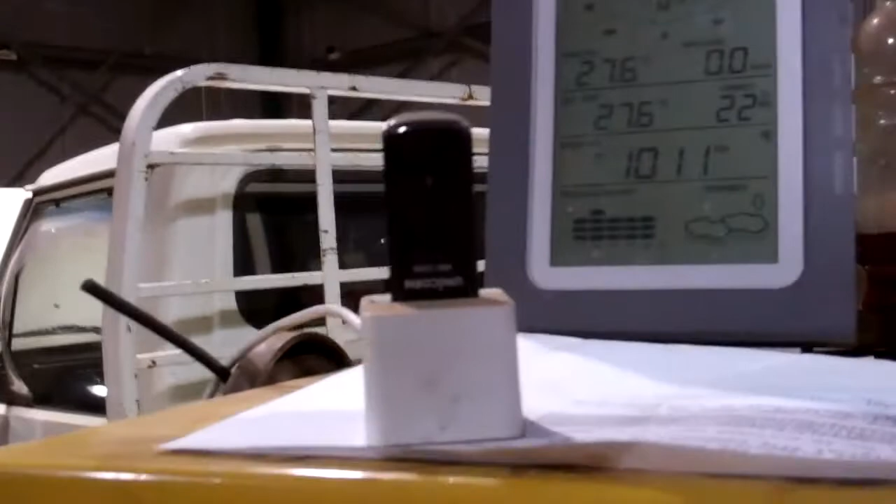This is the little aerial here. That's the dongle that plugs into your computer. So we'll plug him in to the USB port. Rightio, it's transmitting away. Now, this is the program you need to run the wireless Wi-Fi. That's available from the G-Scan Oceania website. Every time you do a software update, you need to load the new one on. The last one's not compatible with the new one. Okay, so we'll hit that, open that up.

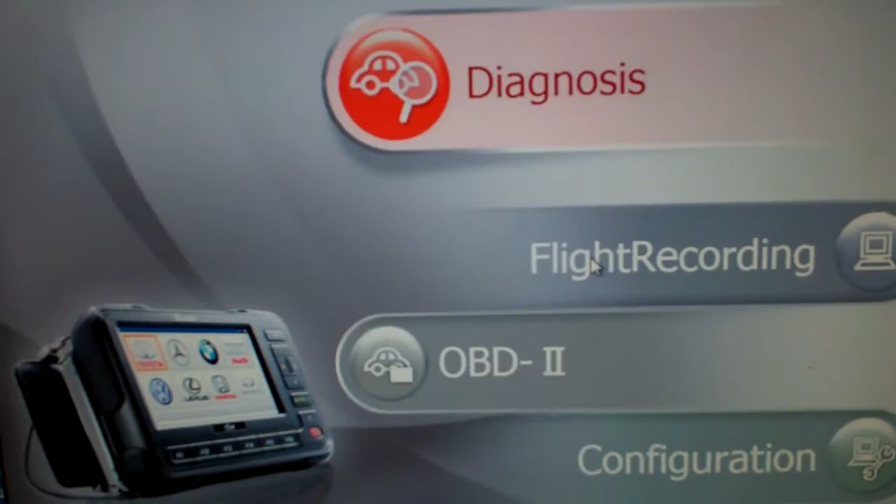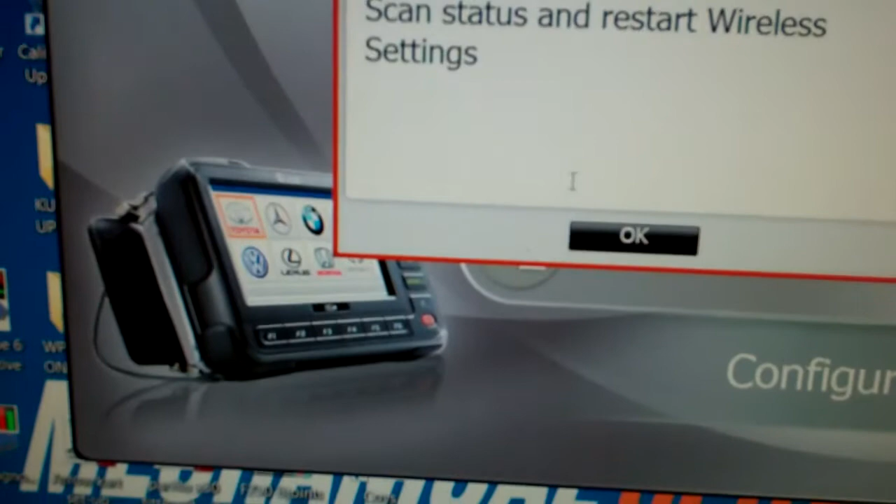Right, we're greeted with this screen. This is our opening screen that just starts us off. As you can see, it's just an emulation of the G-Scan screen up on the PC. So we'll hit diagnosis. Now it's trying to find a connection. Oop. Okay, we need to turn the G-Scan on first.

So come over here, I've got my Hilux in here running, idling away with the G-Scan connected to him. We need to hit F1. That sets up the Wi-Fi mode. Okay, now it's got something to look for. This is the dongle that plugs into it. It's supposed to have a nifty little pouch that goes into the handle of the G-Scan. They should do away with the original handle. We put this in, but mine didn't work from day one. It's pulled straight out, so I don't have a handle. It doesn't matter. And it plugs in the top there. Alright, so that's now going to be emitting a signal for this one to look for.

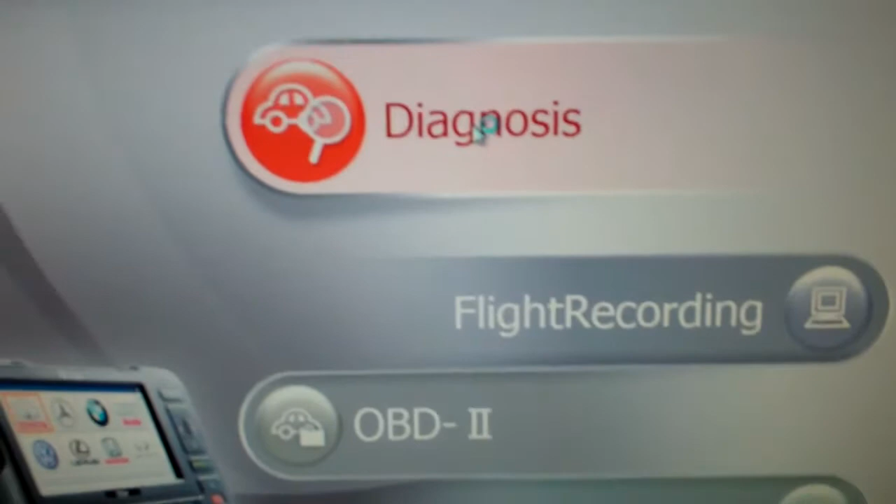So we'll try again. Okay, diagnosis, undertake wireless connection, and yep, looks like it's found it. Okay, same thing. There's the G-Scan screen emulated up in your PC. You can't alter the size. That's one thing I don't like, especially with my eyes getting worse. Right, so we can flick through all the different manufacturers here. Obviously this is Toyota, so we'll just go Toyota.

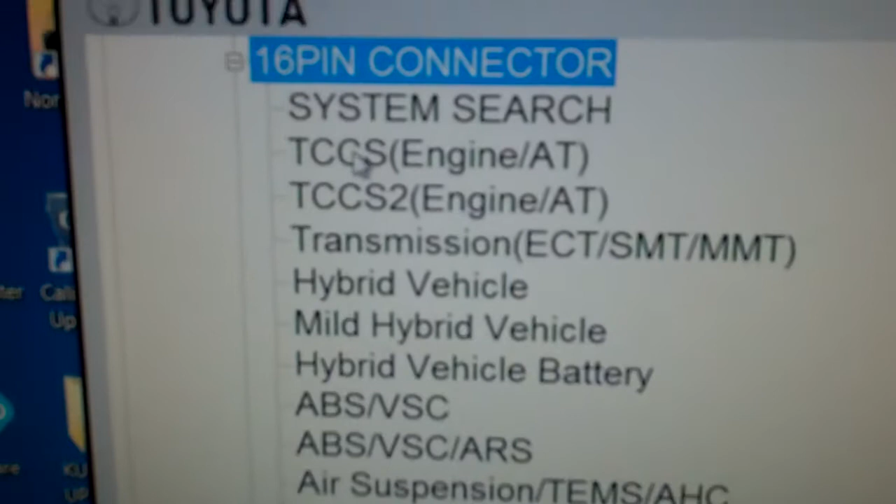Now you can just double click on everything here until you get to a certain screen, then you need to go down to the bottom here. So international, passenger car, all model, all type, 16 pin. Looks really fast, isn't it? Rightio, here we go. Now this is where we have to go down to OK. We can't double click from here.

Good thing I've got a beer on hand for this one.

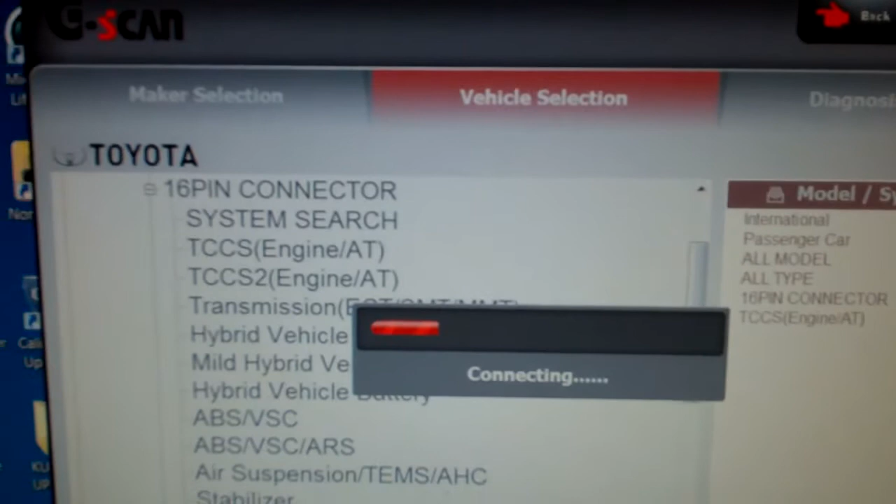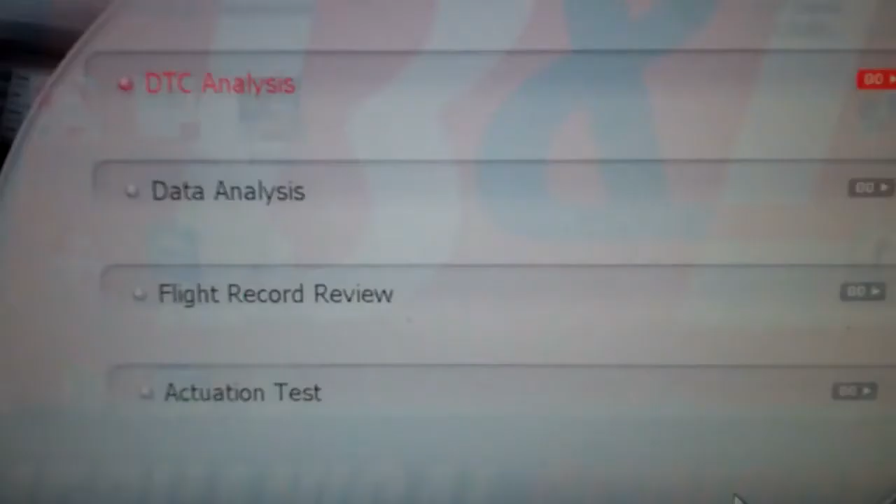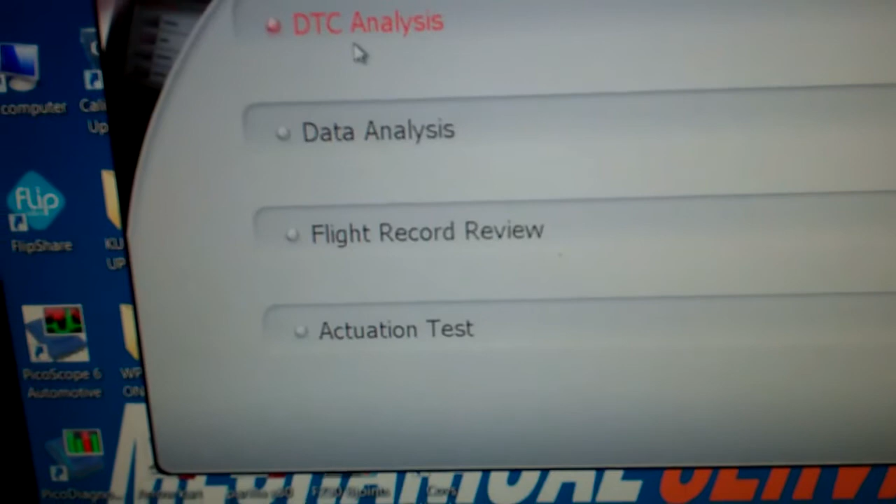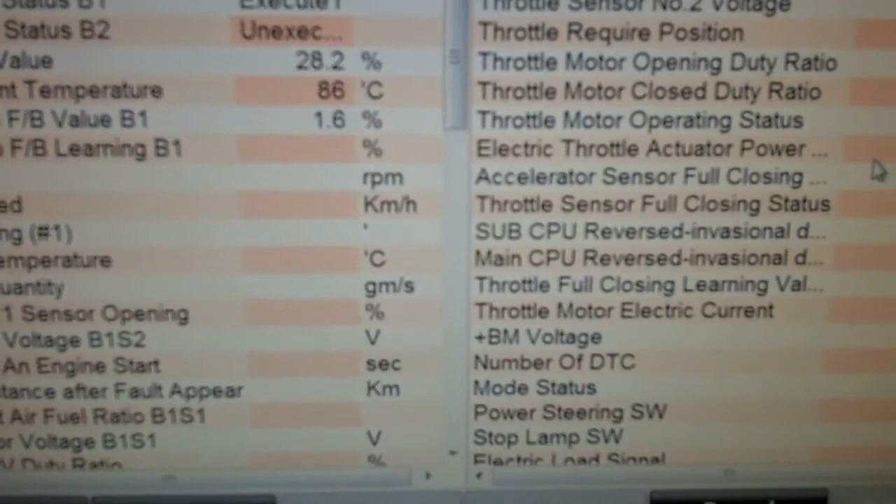Right, we're away. Okay, same thing. You're greeted with the same screen you'd find on the G-Scan. Your trouble codes, your live data, freeze frame review, flight record review, actuation test, special functions, whatever. So I'll just go back up to live data. This is what I was talking about during my post on Auto Nerds. We'll go live data. And this will give a new meaning to slow. Rightio. Come on, load up. Here we go.

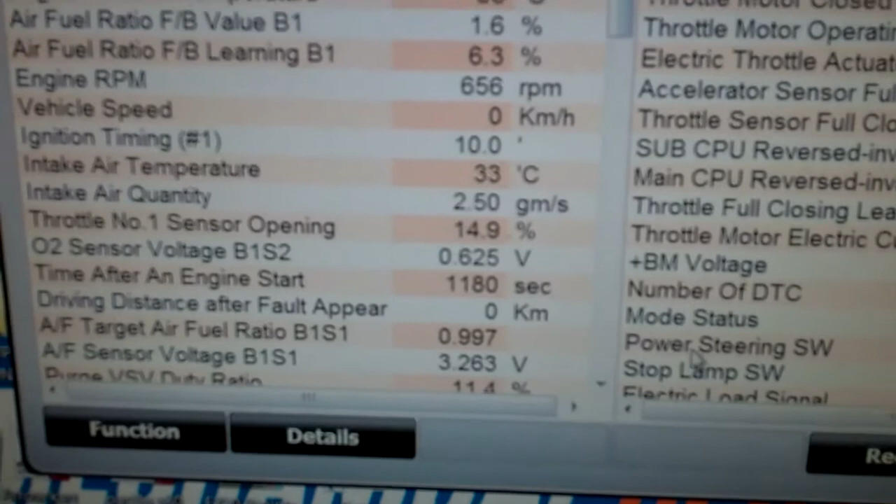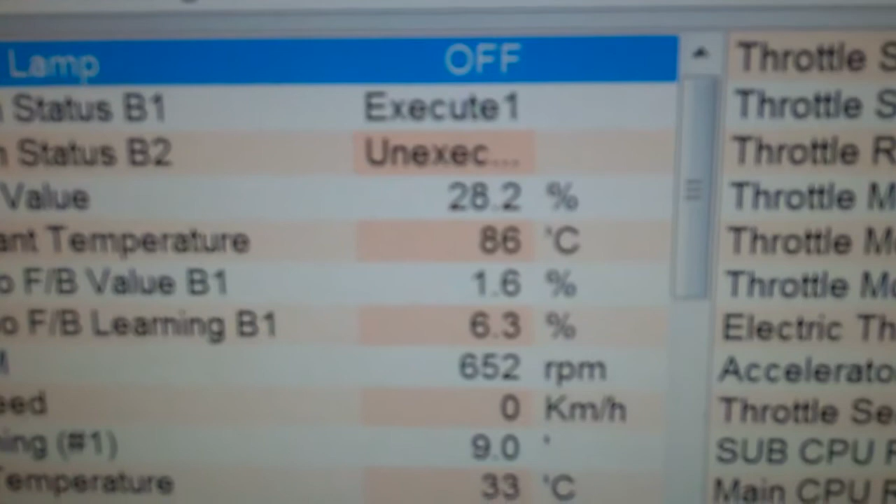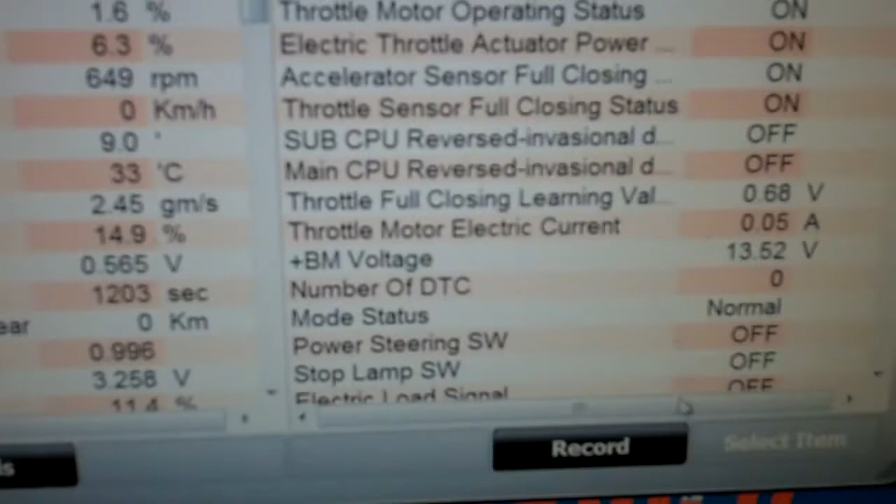I don't know if you can sort of see those values there and the various PIDs. We've got a very, very slow refresh rate. Almost non-existent. And I've tried revving the car and watching them, and yeah, there's not much cop in the live data, but anyway, it does have its good points. That's why I say I use it for injector coding, because I like to sit here and use photographs of the injector codes that I take with a macro setting on my camera, and maximise, minimise it, things like that, just to get all the codes done really quickly.

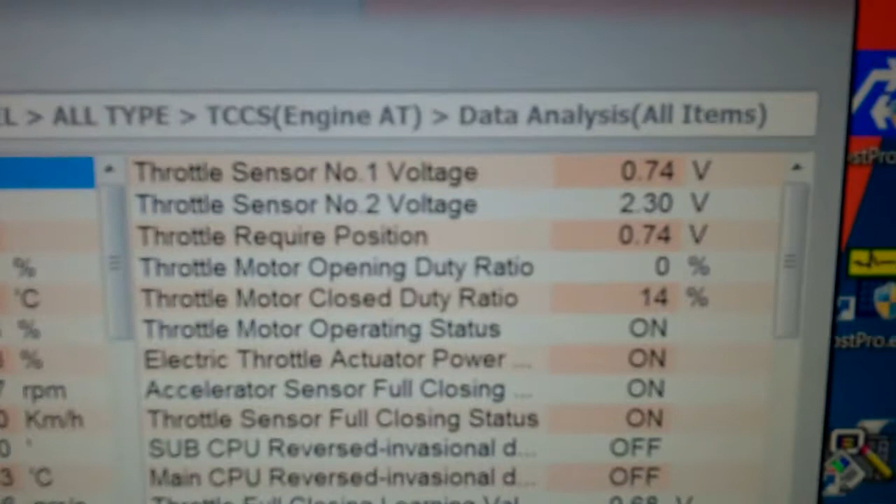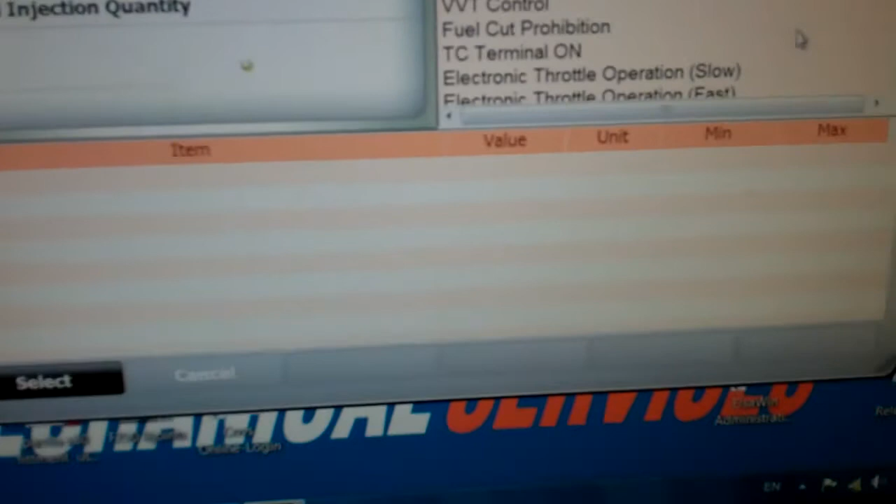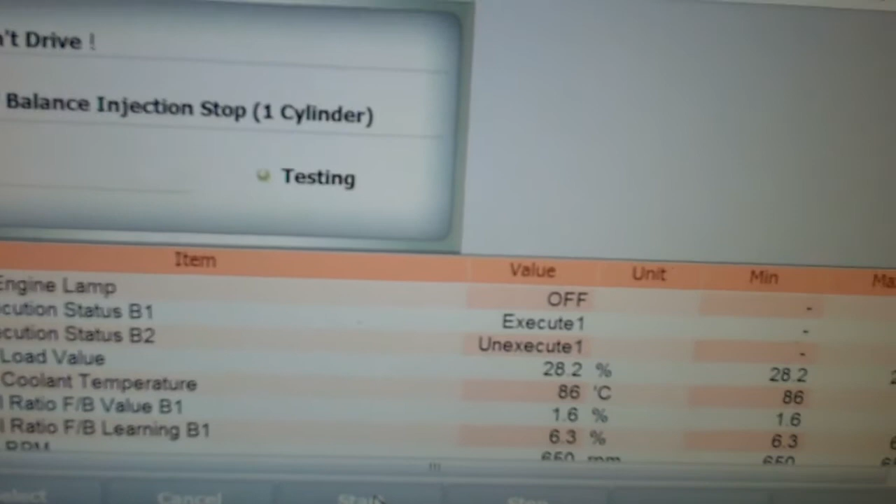We'll go back and we'll look at some of the actuation tests. These seem to operate pretty quickly. It's not trying to sample a whole lot of information, I guess. So we'll do injector balance or power balance. Select. Start. Oh, test failure. It didn't go too good. What happened there? We'll try again. Cancel.

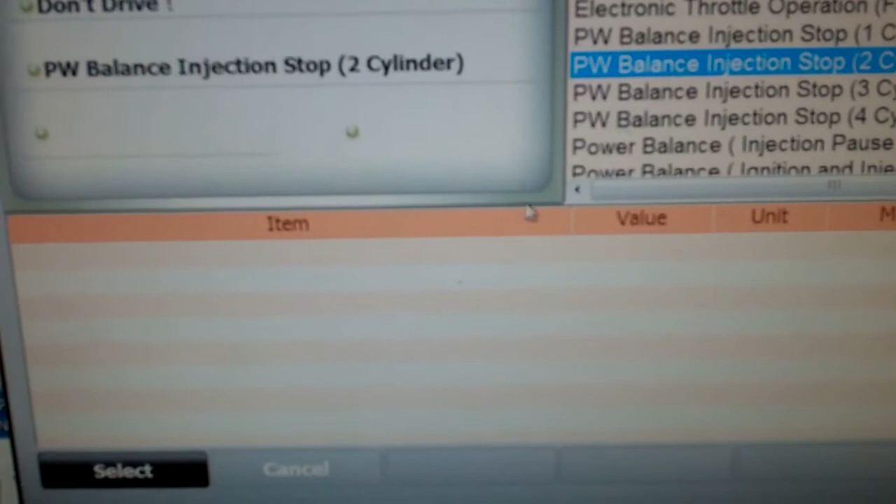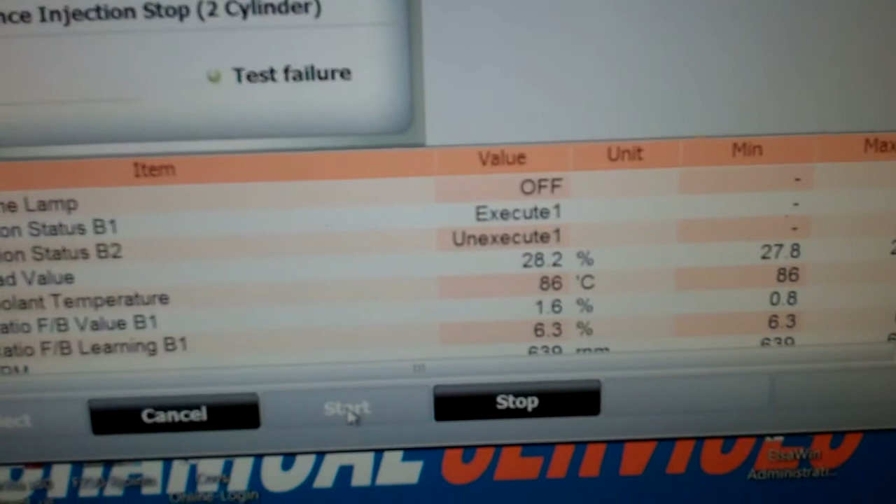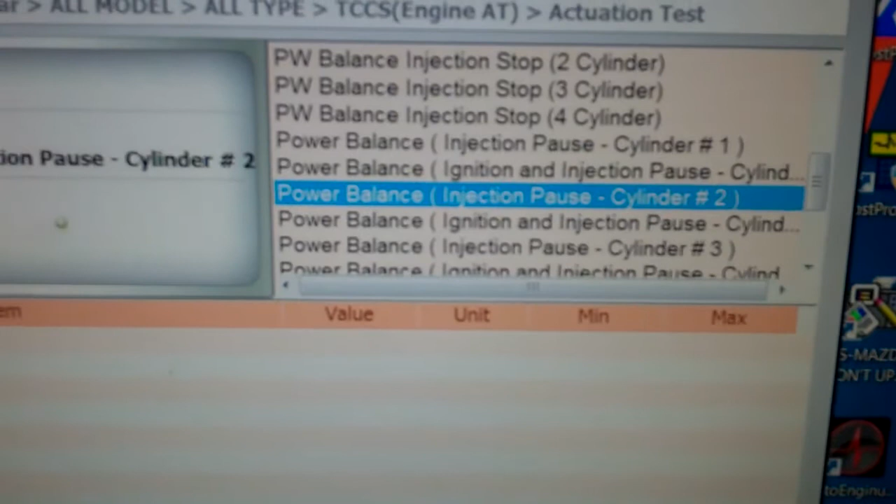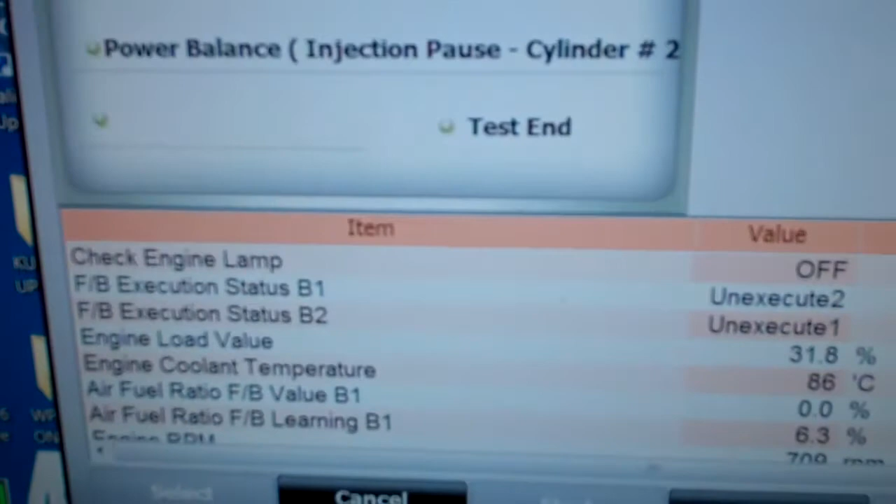Alright, we'll try that one. Select. Power balance injector 2, start. No, test failure. Alright, well, this is making a liar of me now. Cancel. We'll get through these tests, we'll find something that works. Injection pause cylinder 2, let's try that. There we go. Probably can't hear it on my little camera, but that's actually dropped the injector out, number 2. Stop.

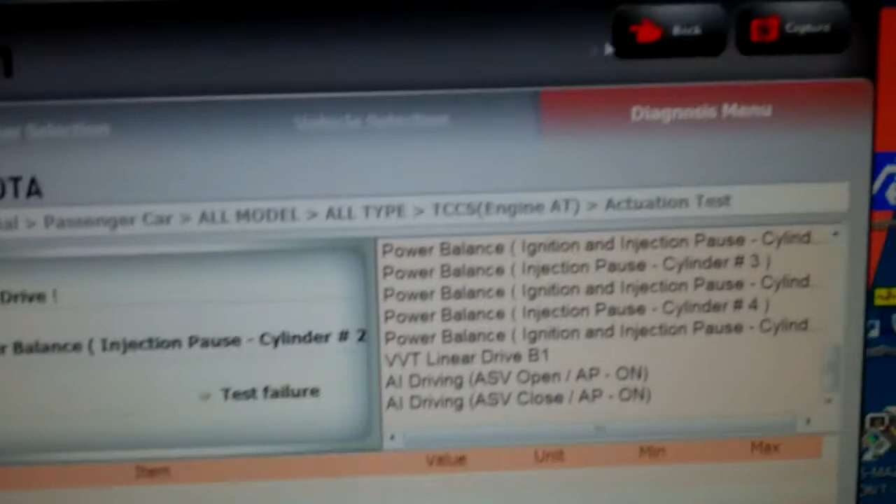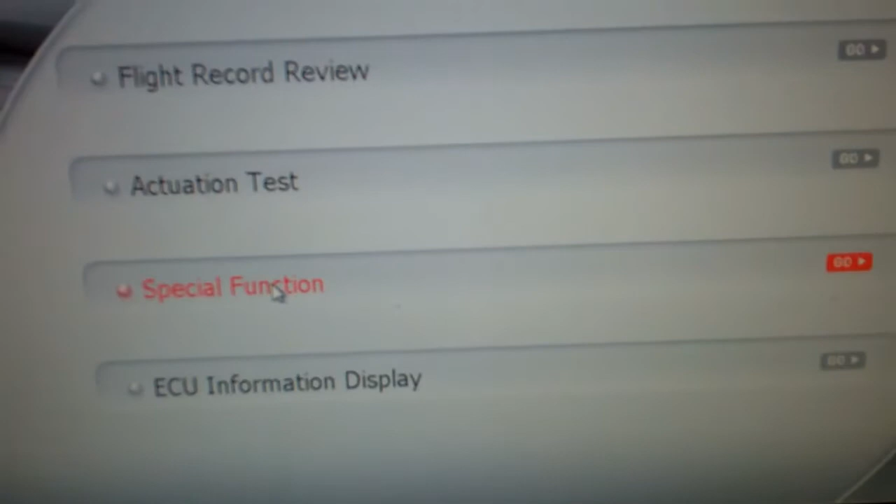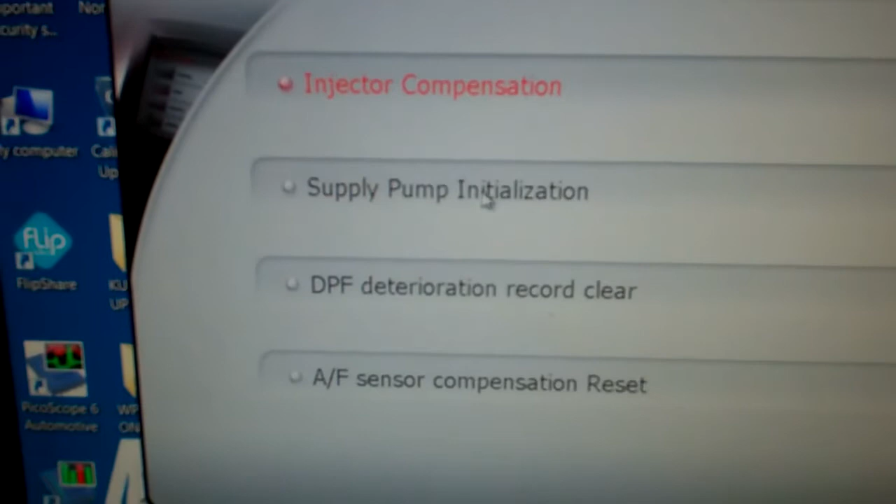As Rod would say, the latency is quite high on it, quite slow. What else can we do? We'll go back. So overall, the whole program is quite slow, but special functions, we'll see what's in there. Okay, that's mainly for your diesel side of it. You've got all your injector coding and all the rest of it. Supply pump initialisation. Back. Oh, there you go. Got the part number of the ECU.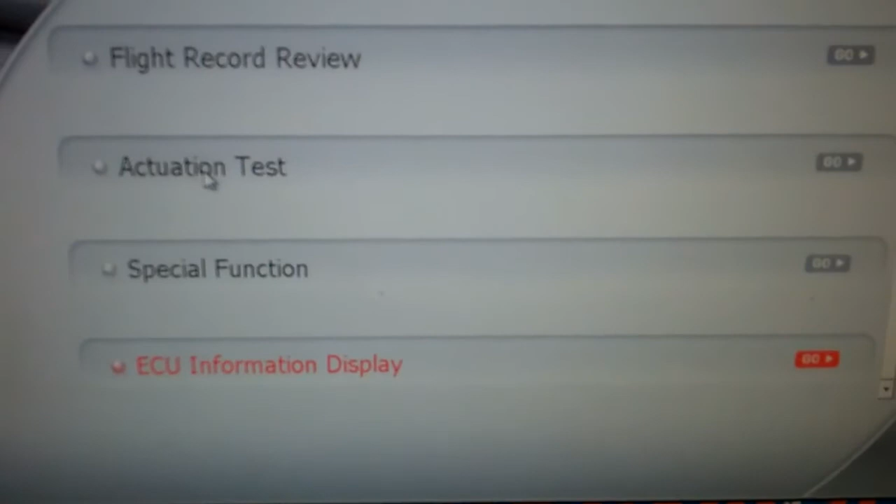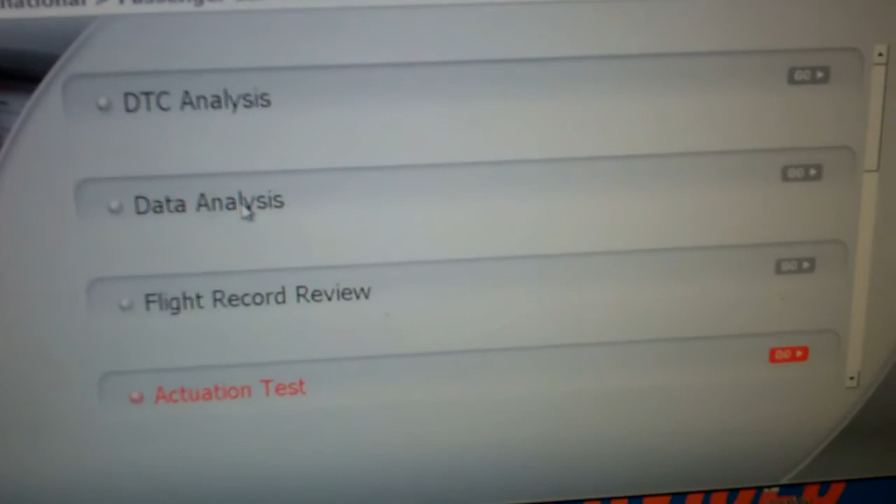But yeah, as I said to you in the post, mate, everything's quite slow. So it's up to you if you want to fork out the folding stuff for it. With certain things it is good, but the G-Scan's actually got a nice long lead anyway, so you can operate it from under the bonnet and whatever, so maybe you don't actually need this, but anyway, I just thought I'd shoot you a quick vid so you can see it.